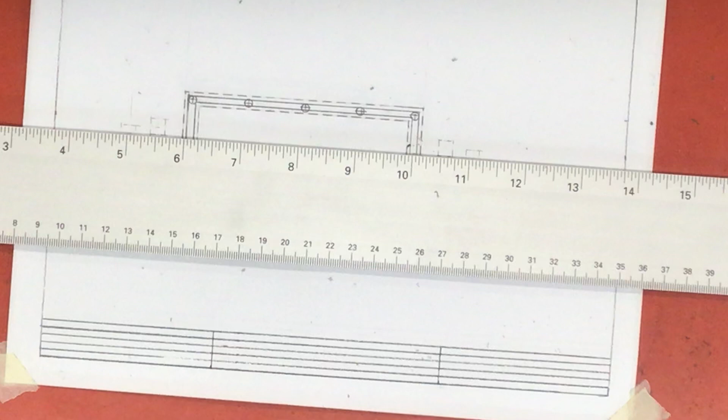Alright, so today what we're going to do first is add these windows.

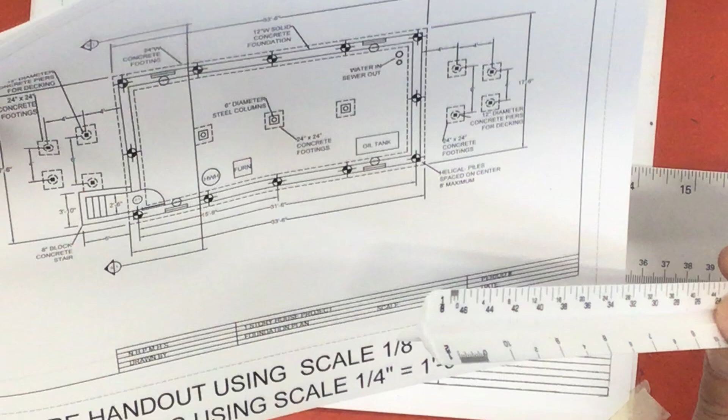So we're going to check these windows. This is drawn at 1/8 inch scale. You're going to measure the window, look at it, and basically it says this window is 2'6". If you look closely at the plan, all these windows are W2 windows or W3 windows. They're all the same exact window, basically.

So what you're going to do is take a reference line measurement to figure out where the start of it is. If you look right here, from the outside of the footing to the edge of the window is 4 feet.

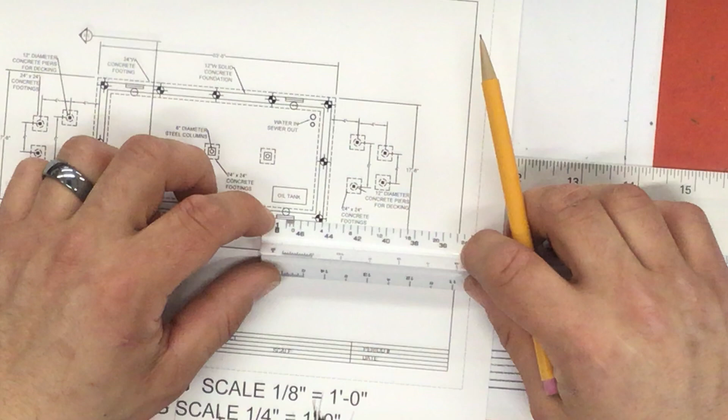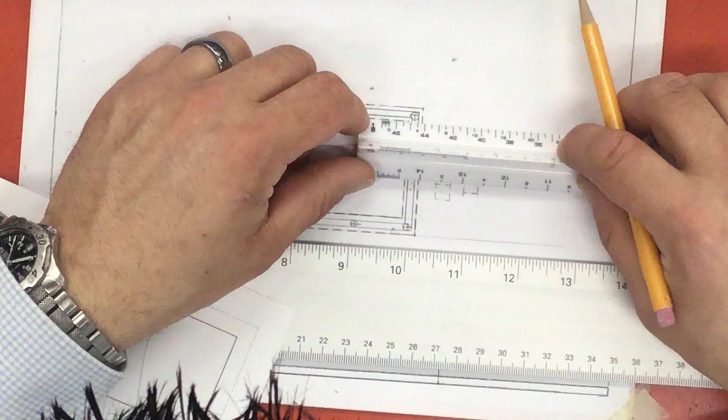On this side, it's actually from the edge of the foundation. So on the left side, it's from the edge of the footing, right side is from the edge of the foundation. Come over here, on this side, edge of the footing, make a mark vertically at 4 feet. On this side, do it from the foundation, make a mark vertically at 4 feet.

From there, you're going to come over 2'6". Same thing over here, going to come over 2'6".

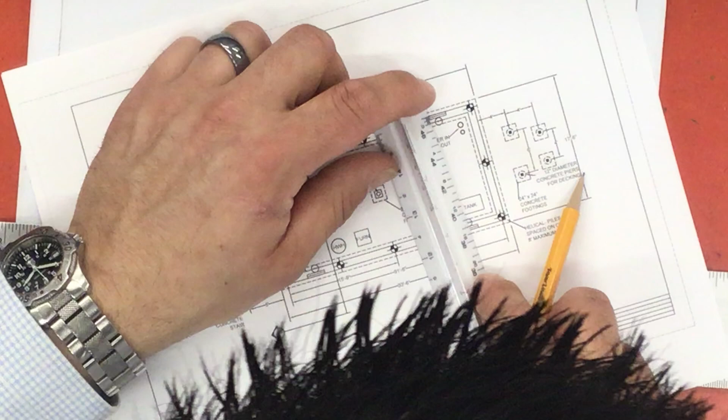Looking at the drawing, measuring down, the window itself is 6 inches deep. So from your outside wall, it's going to be about half the distance. What you could actually use is the reference line from the middle of your crosshairs.

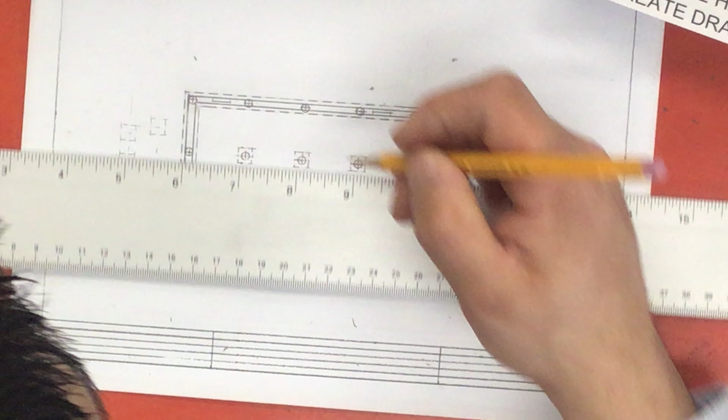Alright, so come over here, line up your crosshairs, draw your line across, draw your line across, come on down, using your triangle, take your edges from the ones above, draw a light line up about to the middle.

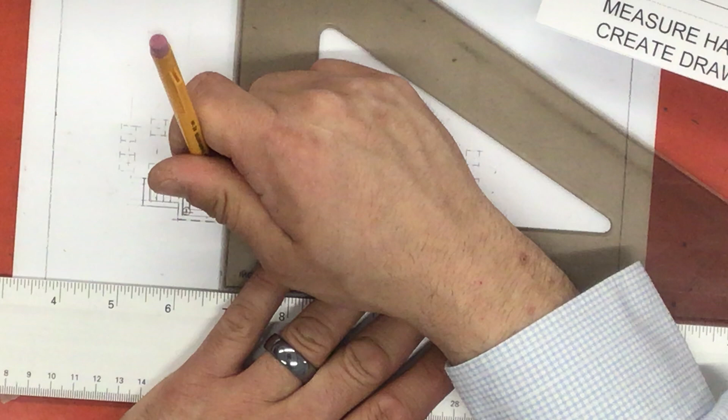Lining up the one above, draw a line up to the middle. Start up, go to your cross mark, bring it across.

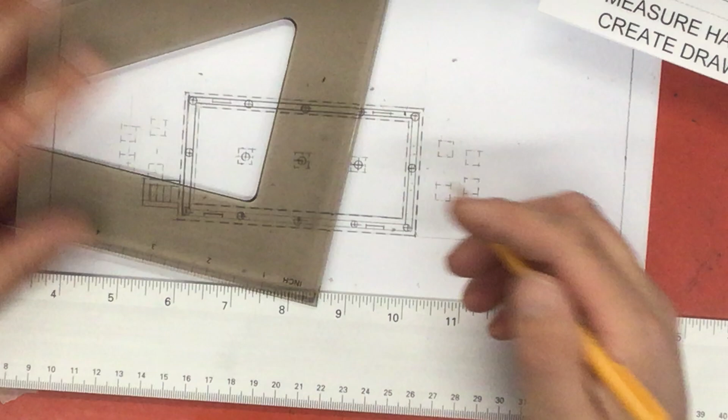And these ones are already done up here. Okay, I'm just going to fix it up like that.

Grab an eraser shield quick. Somebody had borrowed one yesterday.

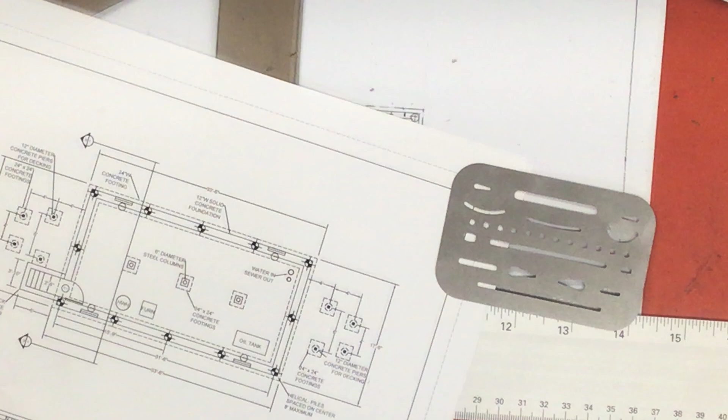Okay, I'm just going to clean up that little lower edge. Kind of messed up. Now, while doing that, if you end up erasing a little bit of your line, that's okay. It's always easier to redraw a line than it is to erase.

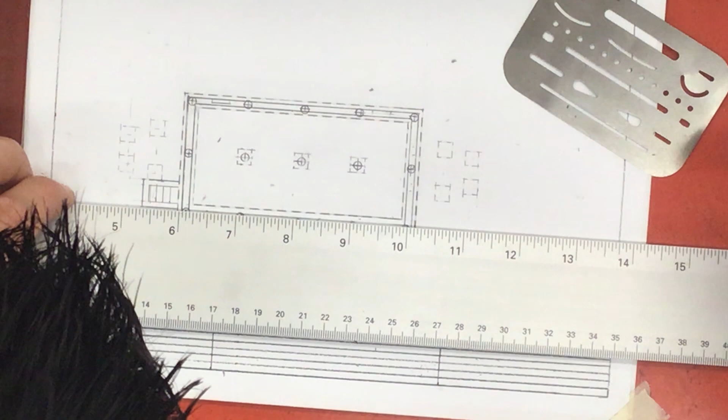So you just go back and just redraw that little piece that we had to erase because it was in our way.

Okay, so those are your windows that are included. You can actually put an extra line through them in the middle, like you see in the example, if you can fit it. Right in the center, right in the center.

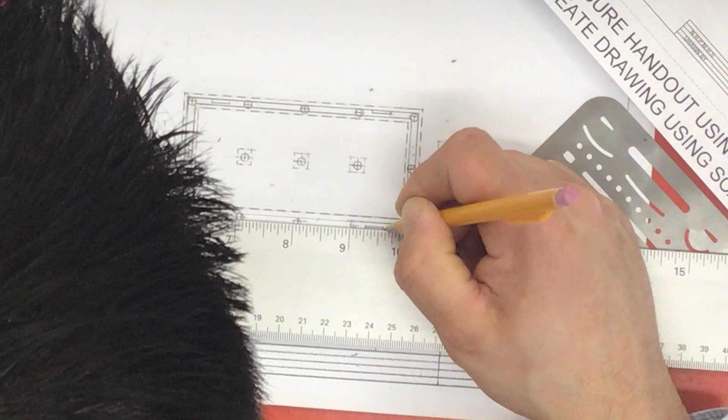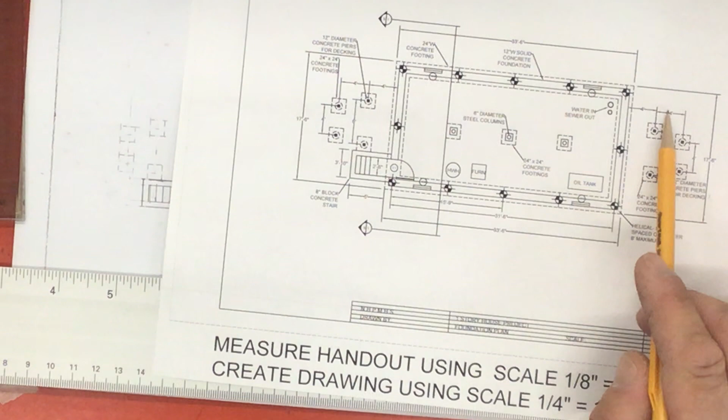Okay, so now your windows are done. What's next? Next we're going to draw in the dimensions over here. Generally I would try to line the dimensions up like we did on the left, where the 4 and the 4 line up. I don't know why this one dropped lower, but it looks like it did.

When you're setting up your extension, your dimension lines, just line up your center points. Draw yourself a light line up. Draw yourself a light line up.

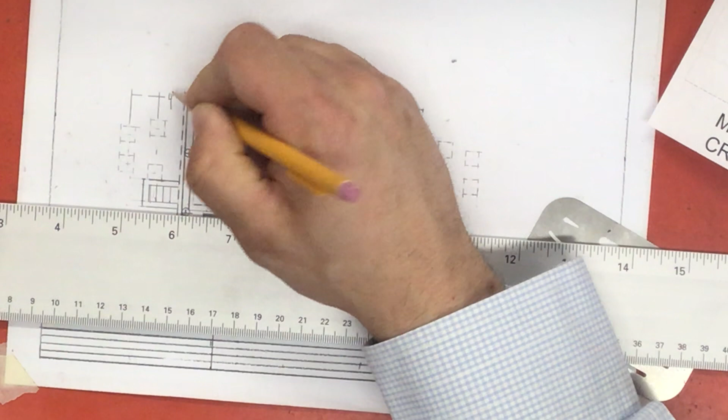Okay, use your T-square. Bring it across about 1/4 inch down from the top. Come across, draw your line. All right, this is going to be 4 feet, 4 feet, add arrowheads.

Okay, dimensioning at this point should be easy enough for you guys to just do on your own. You shouldn't have to go through and show you each and every step.

What I will show you is how you can include the oil tank, furnace, the hot water heater. For the oil tank, you're going to take your scale, measure over, and you'll see that from the footing, it's 1 foot in, and it is 5 feet wide.

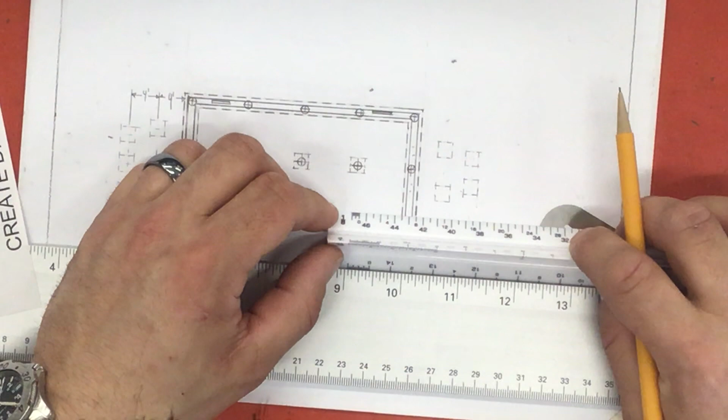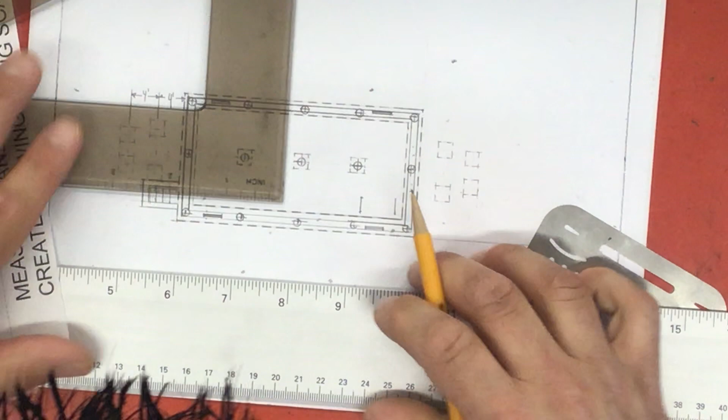Triangle. Bring your 2 lines up. Bring your line across. Bring your line across. Now you have your oil tank, your furnace.

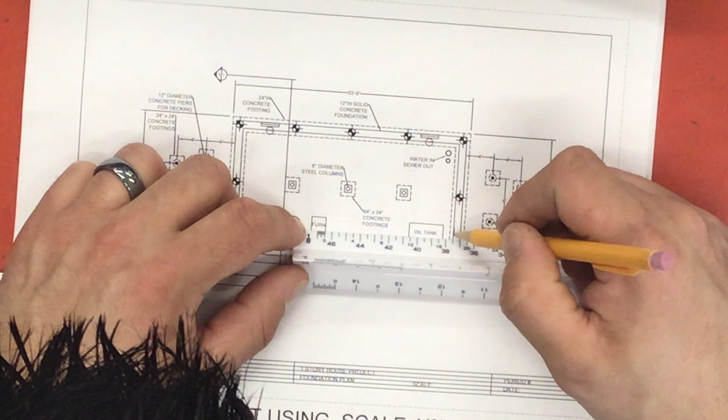Same idea. You can measure from this one, looks like right from this foundation wall here. We're 18 feet in, and the furnace itself is 2 feet. It looks like it's the same distance off the wall.

Okay, this is actually 8 inches. So once again, we're gonna go 18 feet in from the foundation, and then 8 inches up. So put it on the 18 from the foundation, mark the point.

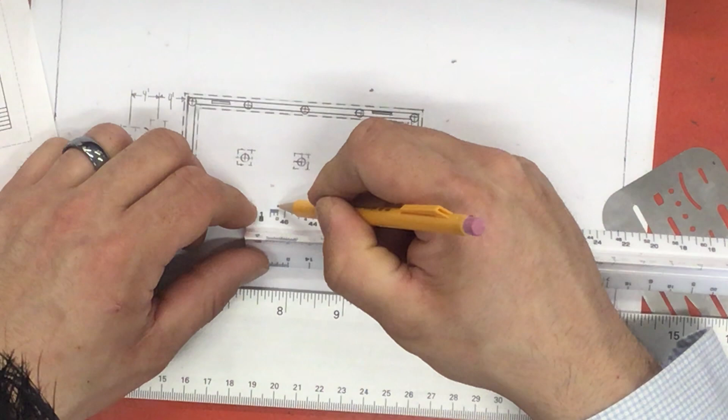Come up 8 inches, and it's 2 feet by 2 feet. So 2 feet wide, 2 feet high. T-square. Bring yourself 2 light lines across, triangle.

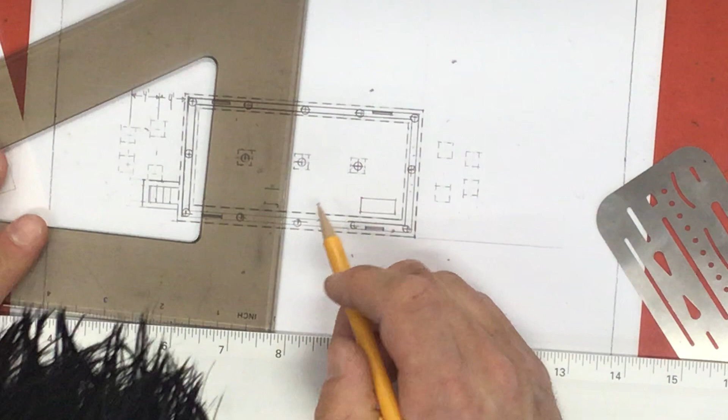Okay, there's your furnace. When it comes to drawing your hot water heater, measure the diameter. It's a 2 foot diameter.

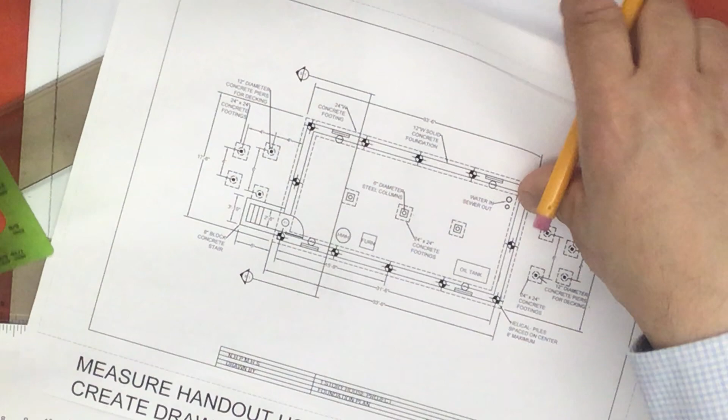We're using 1/8 inch equals a foot scale. 1/8 inch would be 1 foot, so 2/8 inches would be 2 foot. So a 2 foot diameter would be the equivalent of a 1/4 inch diameter circle.

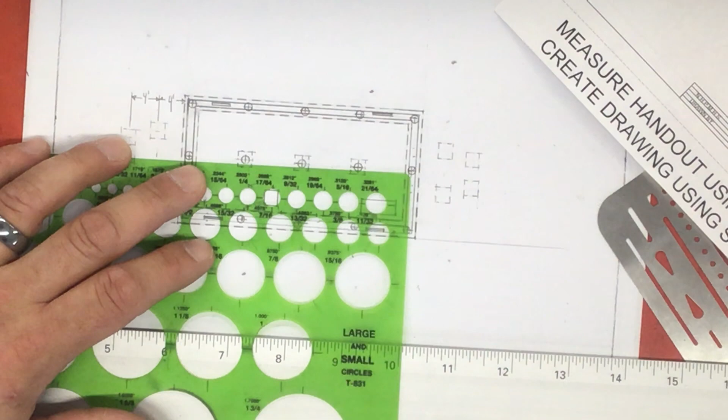So to find a 1/4 inch diameter circle, we're going to line it up with the same center point as the furnace. We're going to double check the distance between the furnace and the edge, and it looks like it's about 18 inches.

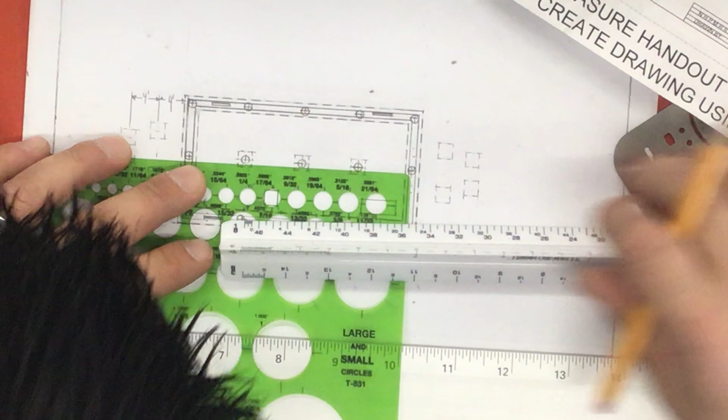I'm going to take my ruler, put it on this one, move my circle over to 18 inches, and draw a circle.

If you do not have a circle template available, you can just use your compass or something else that is similar in size. Those are your basic little add-ons.

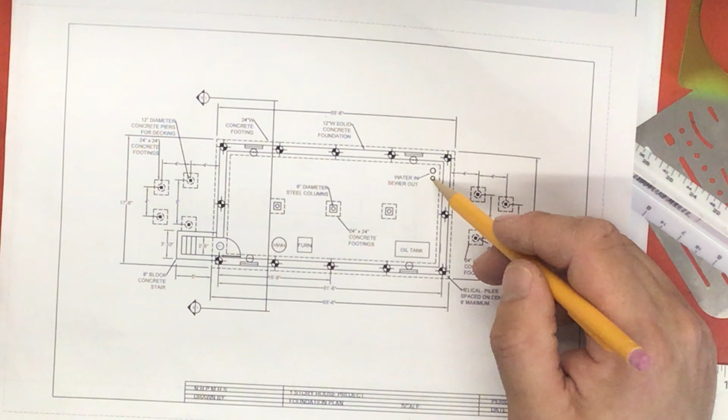We're just missing the water in and sewer out. These are basically your water line that comes up into your house, and this is your sewer line that goes out of your house.

What happens is they put pre-holes in the bottom of the foundation, on the bottom of the floor, so that you do not have to penetrate through the side.

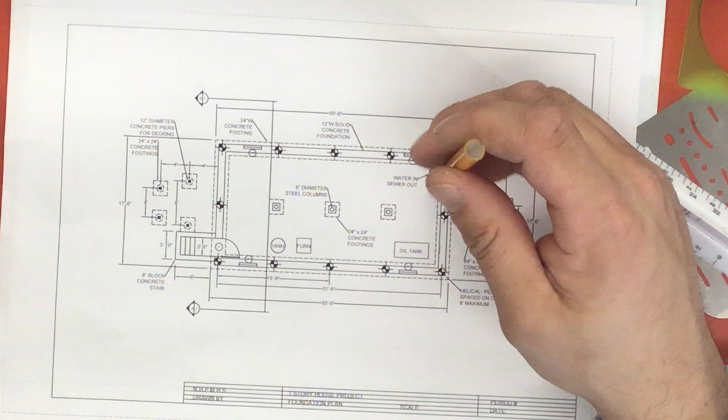You actually bring the pipes up through the bottom of the house, and that would power the water for your furnace, the water for your sink, the water for your hot water heater, and then the sewage from your toilets would also go out the other hole, obviously not the same hole.